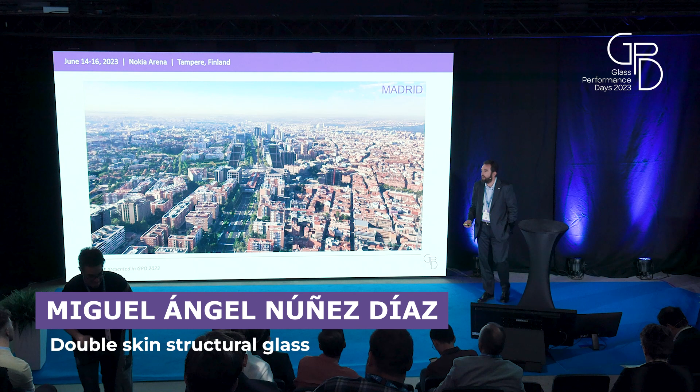previous to going to the project, I want to explain to you more or less the environment of the building, because I think it's important to understand the final result of the building.

This is a big view of Madrid, our city. And this is more or less the main axis of Madrid, the Paseo de la Castellana, and all around this area we have the most important buildings and office buildings that we have in the city.

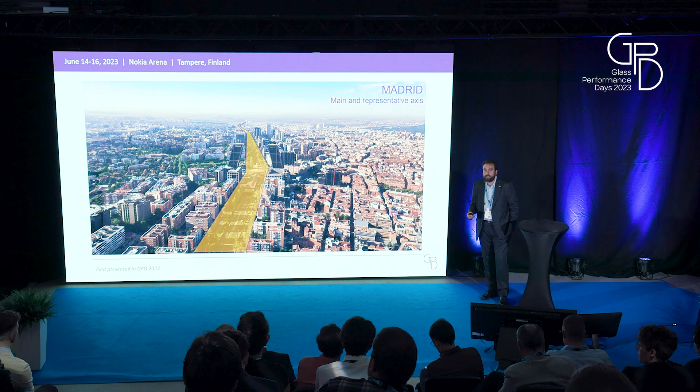But all these buildings were more or less built in the 70s and 80s of the last century, and their performance is not very high. For that reason, in the last year we are refurbishing a lot of these buildings, in order to improve not only the performance or the behavior of the facades according to the new balance of energetic efficiency, but also the external image of the building, because new brands want a facade and a building that is in line with the new age.

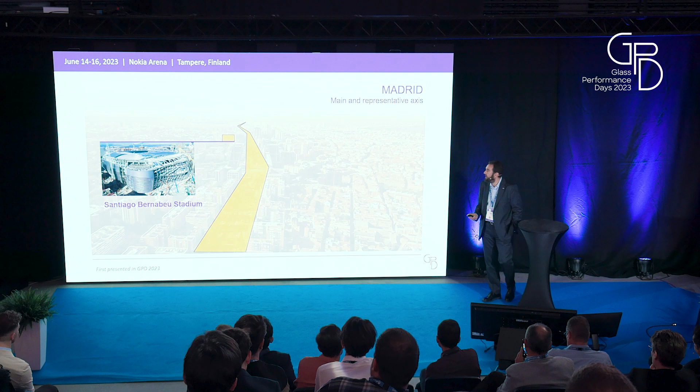In that way, we have here in this area some special elements that are now under refurbishment. For example, the Santiago Bernabéu Stadium, that is the big one that we are now developing in the restoration. And on the other side of the Paseo de la Castellana, we have the Colón Towers, another iconic building now under refurbishment.

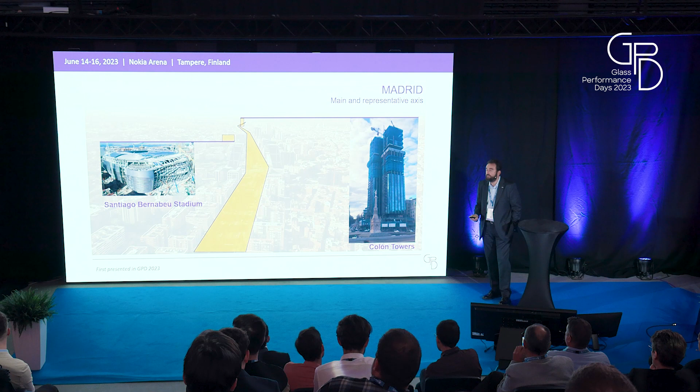But in the middle of these two big buildings, we have this business center that is called Azca in Madrid. This is a big square with a lot of office buildings, and it's the business center of the city.

This year, a contest in order to refurbish all the area was approved, in order to change the image of this area from an office building area to one with more green spaces, more trees, more gardens, in order to give more space to the people and avoid giving too much space to the buildings.

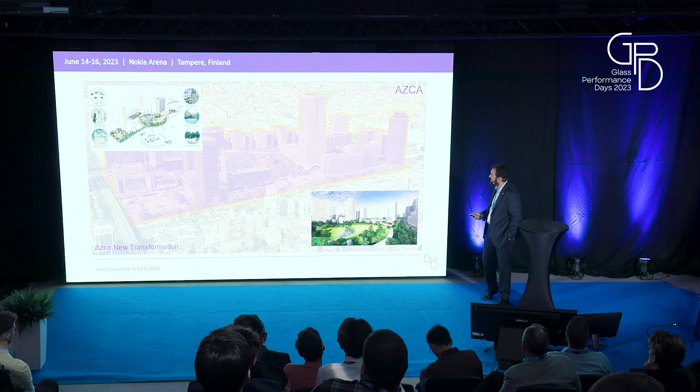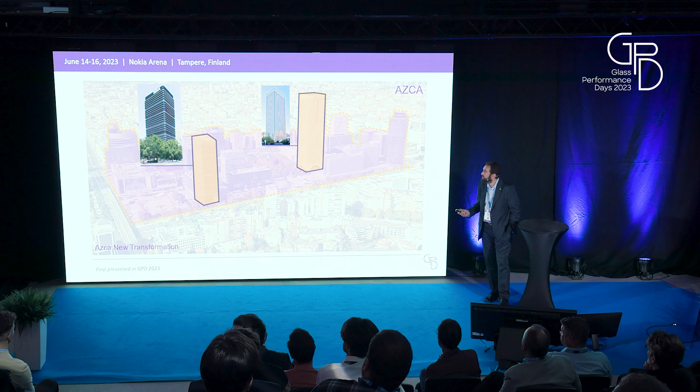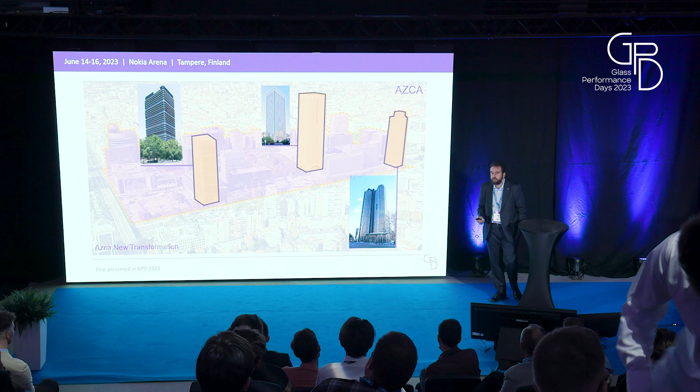With this situation, we have some iconic buildings in this area: the BBVA Tower, which is iconic in Madrid and was refurbished 2 years ago; also the tallest building in Madrid before the construction of the towers in the north of the city, the Picasso Tower; and the Torre Europa Tower with an iconic lobby that we presented here 4 years ago.

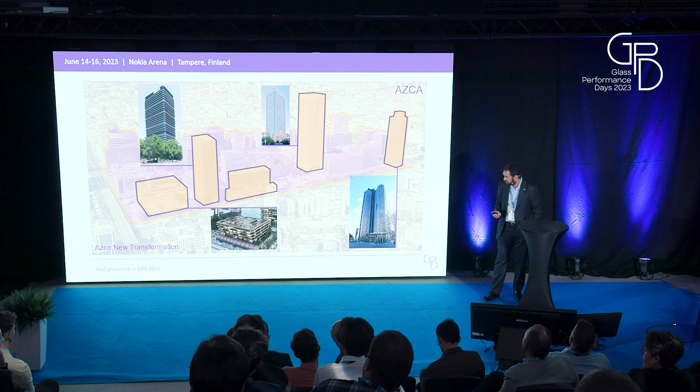And in the future, we will have here another iconic building for the Heatherwick studio. It's a green office building with a lot of trees and vegetation in the stories. And then this is our building. It's in the center of this office area and business center area, with the main facade on Castellana Street. This is the previous stage of the building — it's a very opaque building, a very solid building.

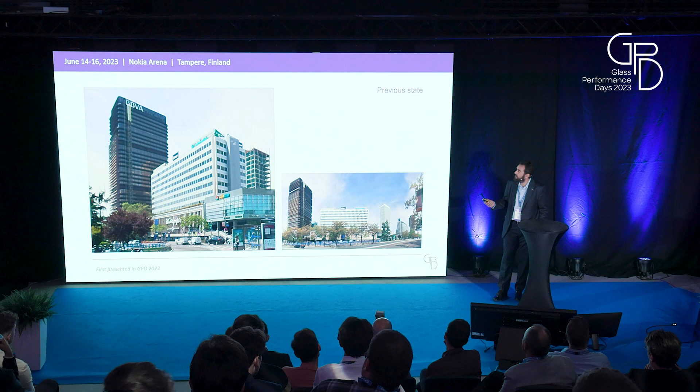It's very close to the BBVA Tower and the Picasso Tower, and only has horizontal windows in the top and a ground floor in the bottom that is a commercial space. This is a special building because really it's two buildings in one building. The upper building is from one owner, and the bottom building is from another owner, different owners.

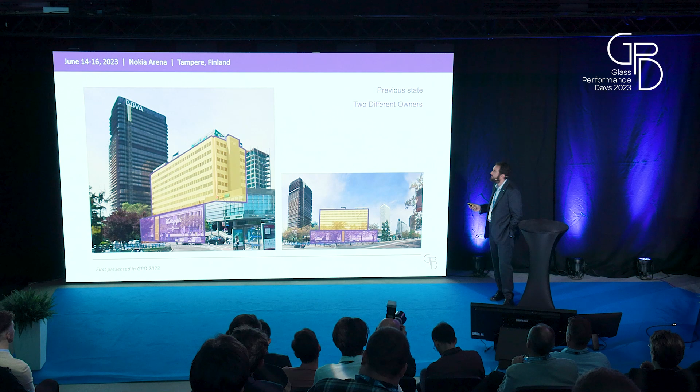But between them, we have a servitude that is necessary to access the upper building through the lower building. This makes it difficult to signal the entrance to the upper building. This is the image of the actual situation, with the two buildings more or less under refurbishment.

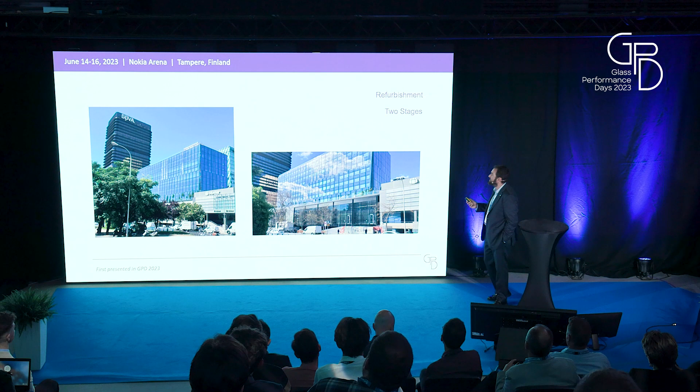In the top building, we have a glass box with all the facades glazed, and in the bottom part, we have the lower building, that is a commercial building, that is now under refurbishment. And you can see the different use of the two buildings.

There is a challenge here because we have two owners for two buildings with two architects for two projects and two constructors to refurbish all the building. And it is necessary to have big coordination in order to have the same lines and the same planes of the different facades.

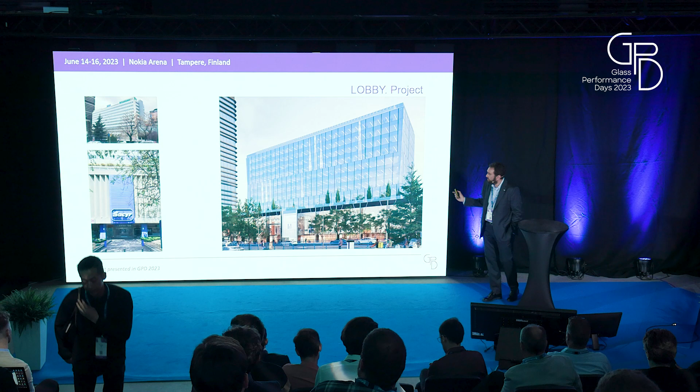If we go to the previous situation, to the actual situation, you can see on the left the previous ground basement, that is precast concrete, totally opaque and very solid. And the new version, this is a render of the final situation of the building with all glass, and in the middle we have the lobby access that we are presenting today.

You can see that the difference is very important because on the left, in the previous stage, the access is signed to the exterior side of the building in the street, and the main objective of the project is to put the entrance of the upper building on the Castellana Street.

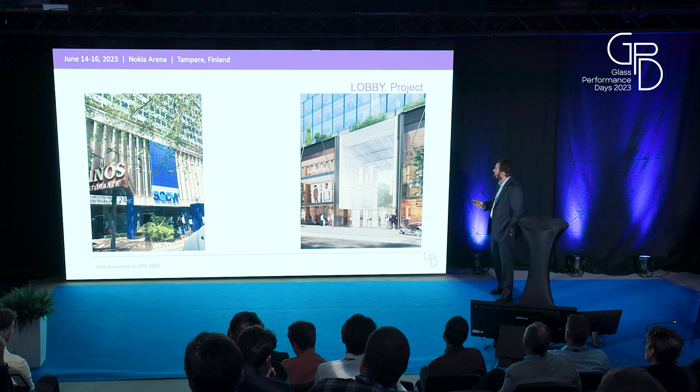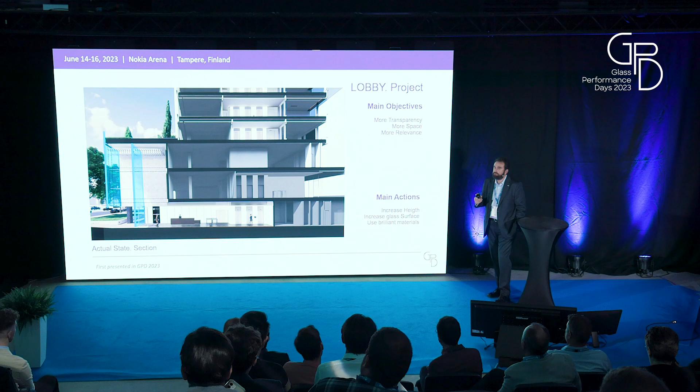The idea of the project is to get more space from the upper building to have a triple height space in the lobby in order to achieve more natural lighting, more transparency, and more relevance in the facade. But here we have two main challenges. One is to convince the lower owner to sell some space of the stories to the upper owner.

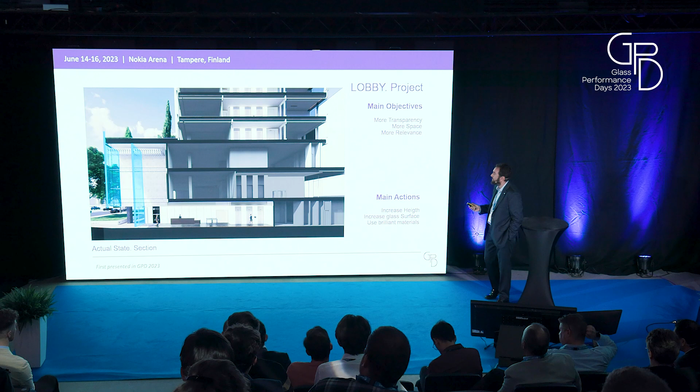And the other one is to cut all the structural slabs, in order to allow the facade to go up and to take more space for the facade. These two objectives were achieved, and for that, the project went forward. This is more or less the last situation of the project.

Well, if we go to the project, the main objective is to avoid vertical elements and structural elements in order to obtain the maximum transparency in the lobby. We have two double skin facades, one on the exterior side of the building and another one on the interior side, aligned with the interior facades of the bottom part of the building. This is the watertight facade.

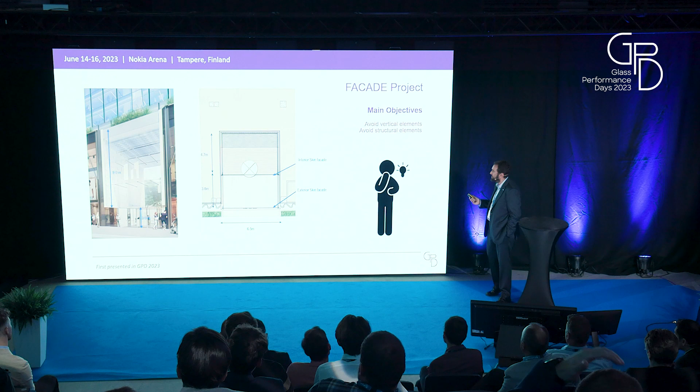But how can we solve this solution? We need to solve a glass pane of 9 meters by 6.5 meters, 9 meters height by 6.5 meters width. And we have two lateral walls in order to support the structure because we cut the slabs. Then we thought to put the lateral supports only, hidden in these walls.

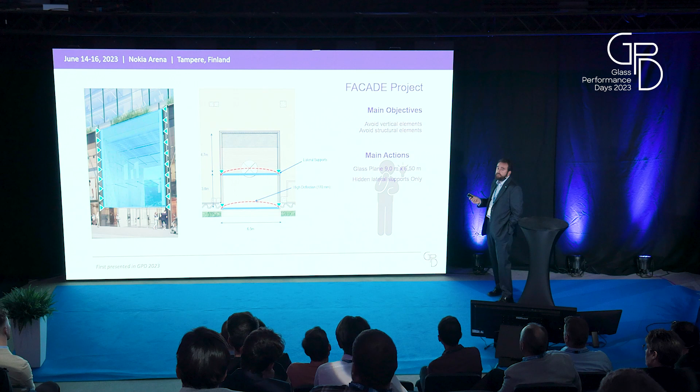But the problem is the deflection of these glasses, because we have a high deflection of 170 millimeters, more or less, and it's not possible to have this deflection. But how can we solve it? We thought about that, and we use some connectors in order to make the two glass panes work together, increasing the stiffness of the solution.

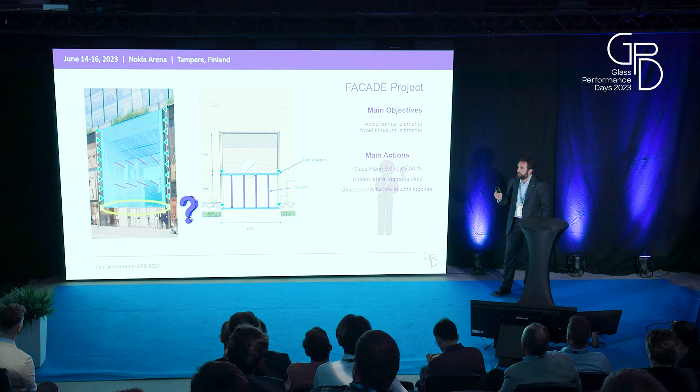We have a very deep beam in order to resolve the wind loads. But in the bottom, we don't have these connectors because it's 3 meters high from the floor, and it's accessible for people. And then we put at these points some stainless steel horizontal plates to support the wind loads, because in this case, the wind loads are 1/2 of the winds at the top.

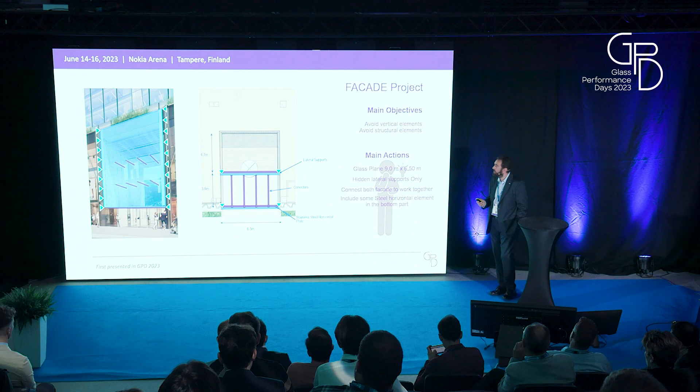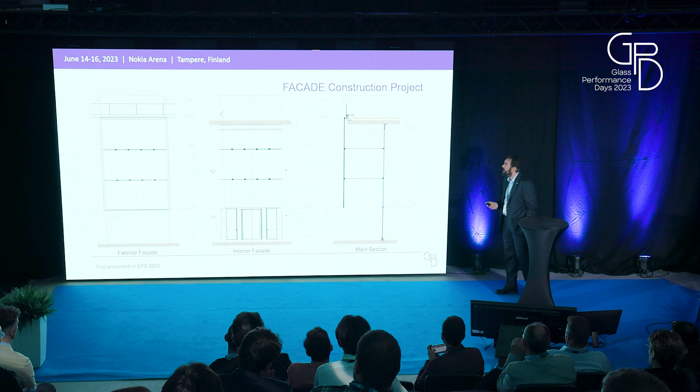With these ideas, we go to the project, and you can see here that we have the two different facades, but in the interior facade, we have in the bottom the part of the doors, the entrance doors, and this is the watertight facade. This is the plan with the revolving doors and the pivoting doors, and you can see here the connectors between the two facades.

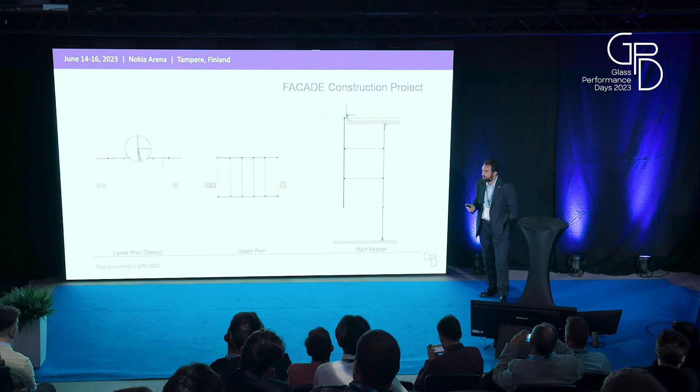If we go to the details, you can see here the lateral supports. We have the main structure that supports the slabs, and is the structure that supports the wind loads in the lateral ones. In this case, we have the lateral support and also the support of the weight of the glass in the corner of each glass.

In the center, we have the detail of the connector. We have some stainless steel rods of 48 millimeters diameter that are fixed with a rotation element to the glasses. The glass is connected with structural glazing with a plate of stainless steel that is screwed to the fixing of the connector. The glass is a triple laminated glass with SGP, and is ultra clear and tempered glass in order to support all the efforts.

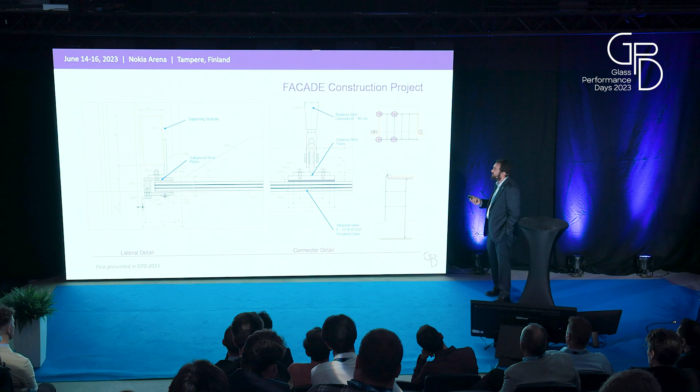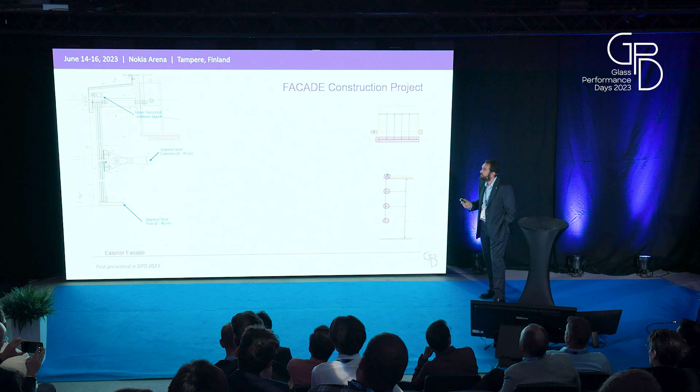If we go to the section, in the top we have another continuous element in order to support the wind loads, and the connector here has some vertical slot in order to let the different movements between the different glasses, but the weight of the rod is not supported on the glass, because the structural glazing is not supporting the permanent loads of these rods.

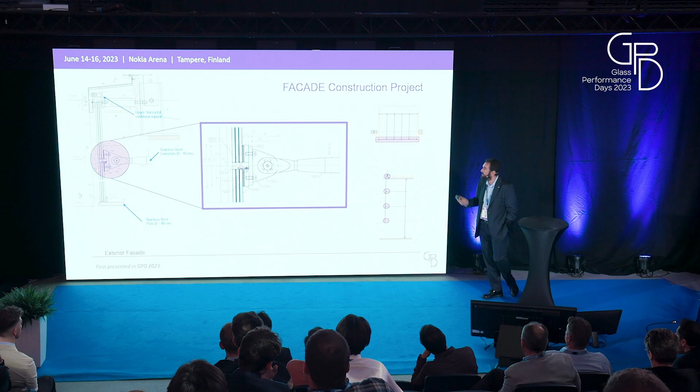In the bottom, we have this stainless steel plate in order to support the wind, but it's 160 depth in order to support these loads, but the height of this plate is only 20 millimeters. That is not enough for all the distance, but it's glued and fixed to the glass in order to have less deformation in this plate.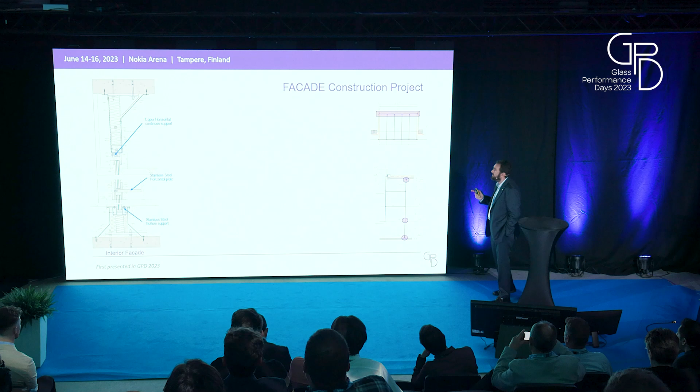In the interior side, we have a similar section with a continuous support in the top. And in the middle, we have the same stainless steel plate, but in this case, it's the joint between the structural system on the top and the structural system in the bottom, with the doors and the revolving doors and the pivoting doors. In this case, to avoid problems with the different deformation between the different elements, we have this space in order to accommodate this deformation.

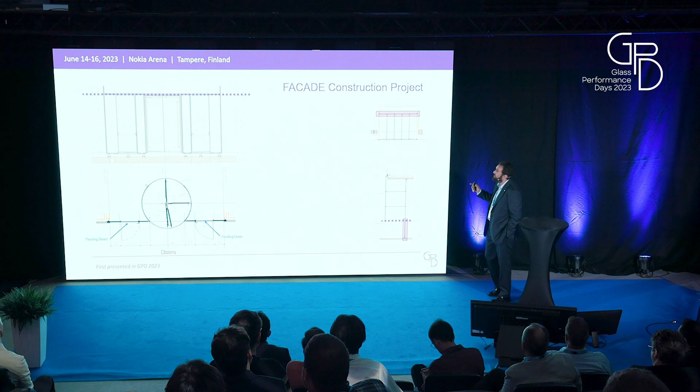Here we can see the plan of the bottom with the revolving door and the pivoting door. And here we have this line that is the difference between the two structural systems. To avoid problems with the revolving door, because the revolving door has more stiffness than the upper facade, we have this gasket element in order to let the different movements between these facades and the bottom facade. Not only in the top, also in the lateral ones. We have a perimeter EPDM in order to let these different movements.

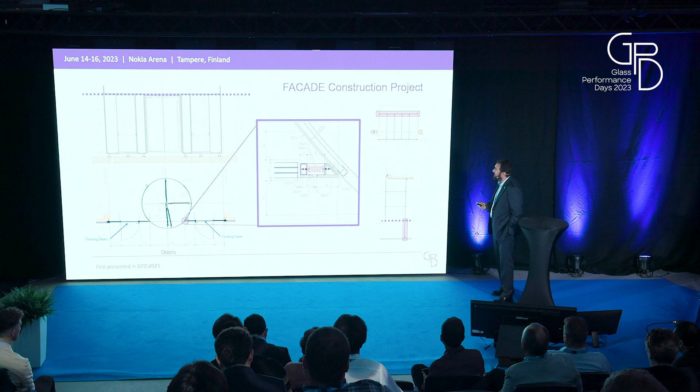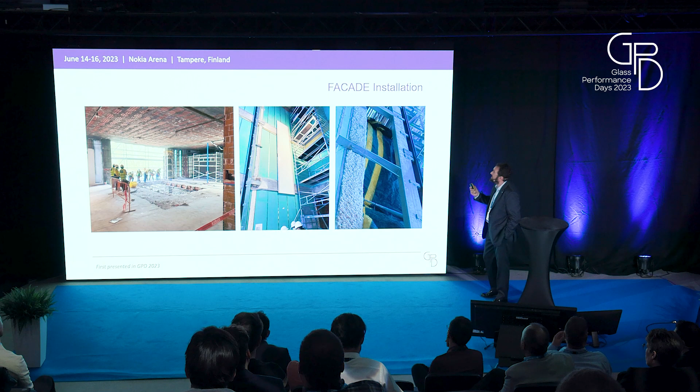Now, here we have some pictures about the construction. First of all, we have the slab cutting, that was so difficult because it was necessary to reinforce the structure and the slabs. And here you have the vertical elements in order to support the facades and the slabs.

This is the image with the glass in installation. In this case, it was critical because the glasses are assembled separately. First of all, the inner facade and then the exterior facade. And to avoid problems with the wind, because it's not connected, some exterior element was installed in order to avoid the wind loads in this moment.

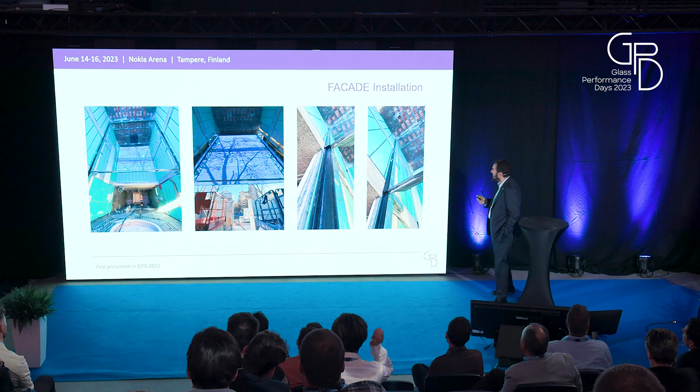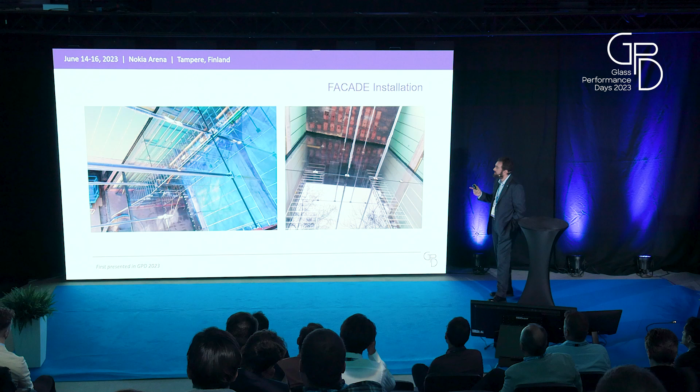Then we go to install the rods in order to connect the two facades. As you can see here, we have two different elements. One stainless steel plate glued to the glass with structural glazing, and then we have another piece fixed to this stainless steel plate in order to fix the connectors. And at the last time, we installed the doors, the revolving doors and the pivoting doors, when all the rods are installed in the top.

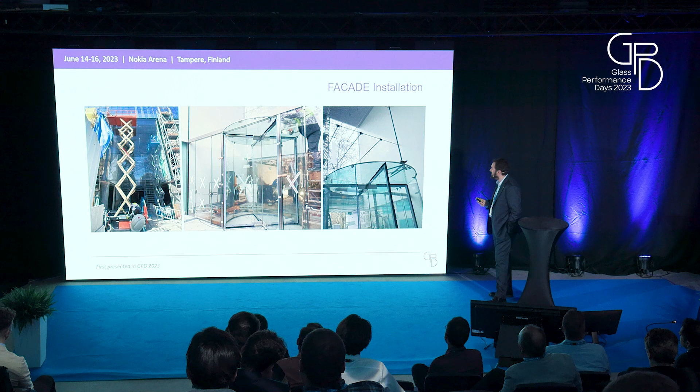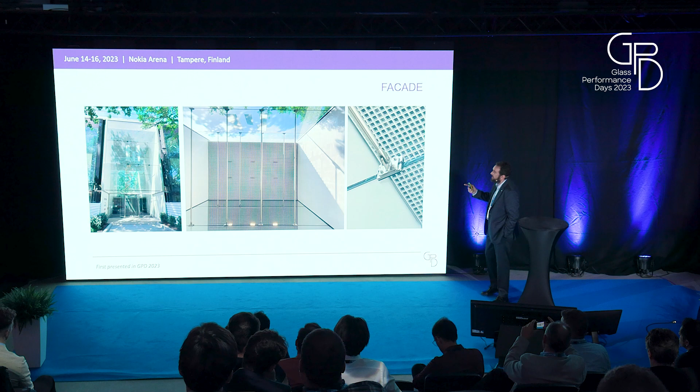This is the detail of the fixing of the rods with the different stainless steel plates and the rod. This is a match with all the connectors from the bottom and the transparency that we have. In this image on the left, because the lower building is under refurbishment at this moment, all these elements are temporary, because the construction of the lower building is not finished.

And this is more or less the result of the doors with a stainless steel plate in the top, hiding the pivoting doors.

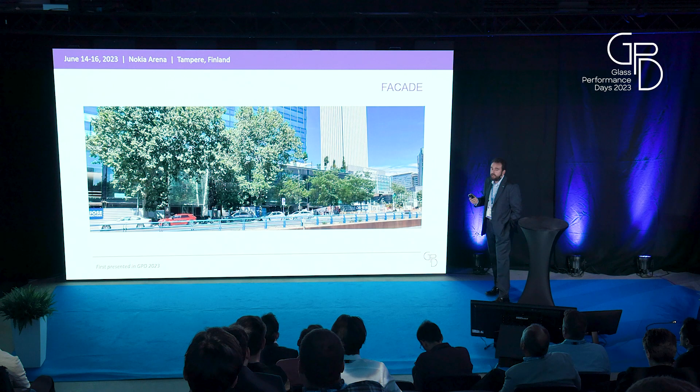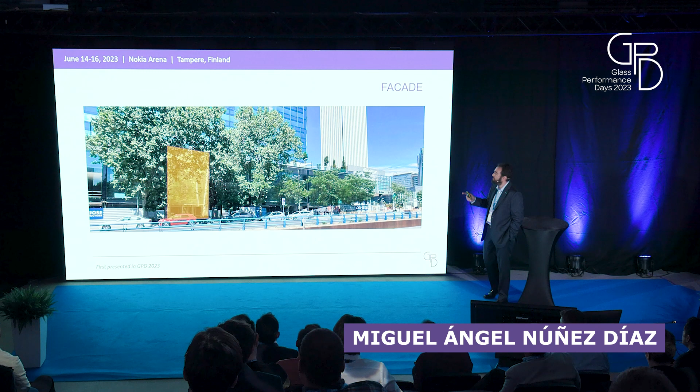And to finalize, this is a thing that we didn't speak about before, that is the sustainability. At least we have a very transparent facade, but without shading. But we have the natural shading and the best shading, the trees, because in summer they cover our lobby that is behind these trees. And that is only thanks to Merlin Properties, that is the owner of the building, Ortiz León Arquitectos, the architects, Bob, the project manager, and Inasus, that was the facade constructor. And that is more or less it.